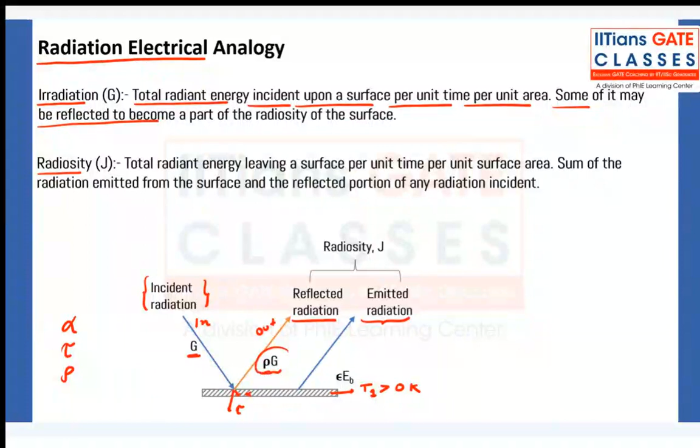Now, how do we write this? It is E is equals to emissivity into EB, since the body is at temperature greater than 0 Kelvin. And this is because of its reflectivity.

Everything that is going out is called radiosity. Total radiant energy leaving a surface per unit time per unit surface area.

Total radiant energy leaving a surface - what is going out? Irradiation is basically what is incident. Radiosity is what is going out - the sum of the radiation emitted from the surface and the reflected portion of the radiation incident.

Okay, chalo. So, radiation electrical analogy - this is what we are going to do. We are going to define electrical resistance. Now, this is one body at temperature T1. And here we have some surrounding.

Even if surrounding is not there, still electromagnetic waves will go out. But of course, it's not vacuum, so there are some surroundings.

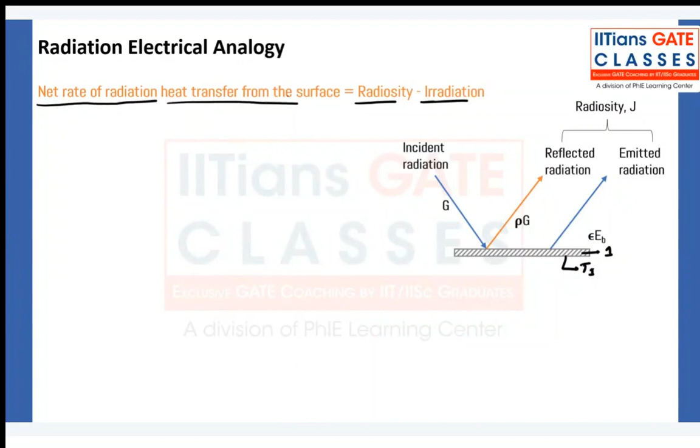So we have defined G. Now, net rate of radiation heat transfer from surface 1, which is at temperature T1 - what is the net rate of radiation? It is radiosity minus irradiation: what is going out minus what is coming in, since we are talking about net rate of radiation heat transfer from the surface.

So can I say Q dot net 1 per unit area is equals to J minus G, radiosity minus G? Now I have just defined G as J minus emissivity EB1 upon 1 minus emissivity. So I can simplify it further: J minus emissivity J minus emissivity EB upon this, now I can cancel this plus minus.

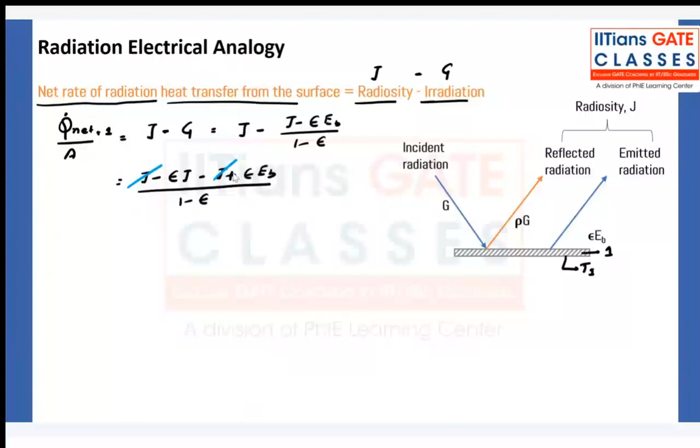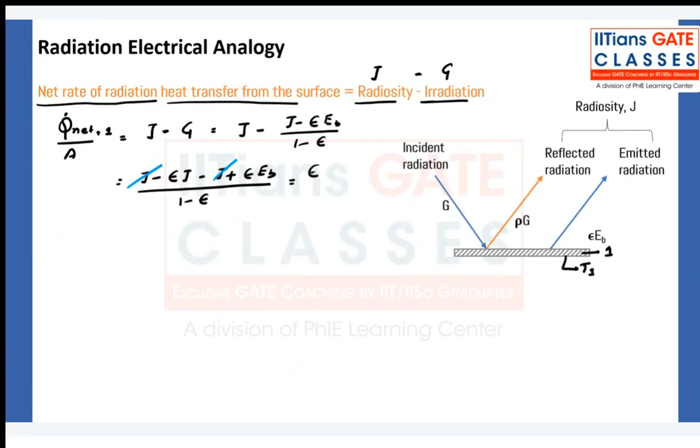Here you will get plus because there is a minus, so when you take it as common, it will become plus. Now how can I write this? Can I write emissivity EB minus J, 1 minus emissivity.

Now let me further simplify it in a way that we know our resistances. So Q dot net 1 per unit area is equals to EB minus J, 1 minus emissivity upon emissivity. Have we seen this form of equation before? Can I say it is the driving force, like the temperature we had - temperature was driving the heat transfer. So this is the driving force and this is the resistance.

Now what is this resistance? This is called surface resistance, because it is happening because of the surface properties: emissivity and reflectivity. So it is called surface resistance.

If you want me to show this, I can show it like this. For example, if this is your body, and if this is a black body, then its radiation will be EB. Now if this is not a black body, it will be emissivity EB. Now because of its surface, it will offer some resistance. This is your EB, this is your J, and this is your Q dot net per unit area, and this will be your surface resistance, 1 minus emissivity upon emissivity.

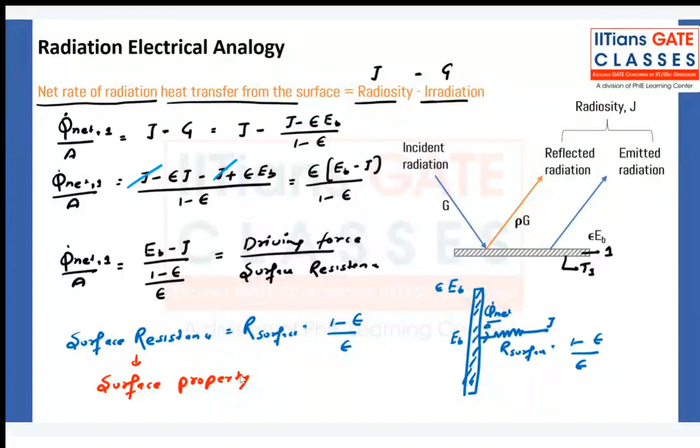So we have defined surface resistance, which is equal to this. Now, for a black body emissivity is equals to 1, so I can say Ri is equals to 1 minus 1 upon AI. Now 1 minus 1 will be 0 upon AI, so surface resistance will be 0 for a black body.

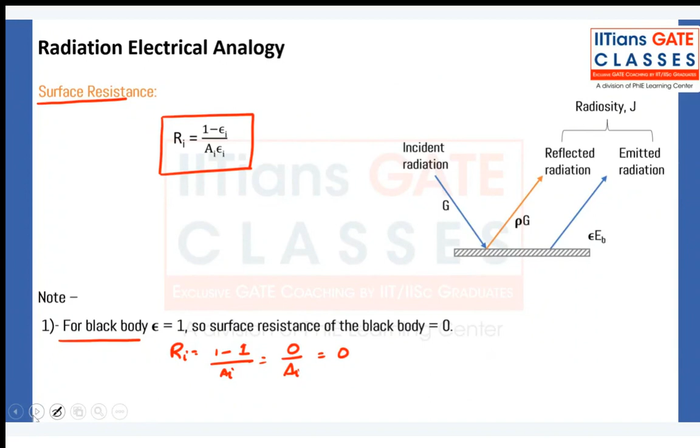Now let us move on to the next topic. We have learned how much radiation heat transfer goes out from a single body. Now let us talk about radiation heat transfer between two bodies, two surfaces. This surface 1 is at temperature T1 and is a non-black body, so its emissivity is E1. Surface 2 is at temperature T2 and its emissivity is E2. Let us assume T1 will be greater than T2, so T1 will have more radiation going out than T2.

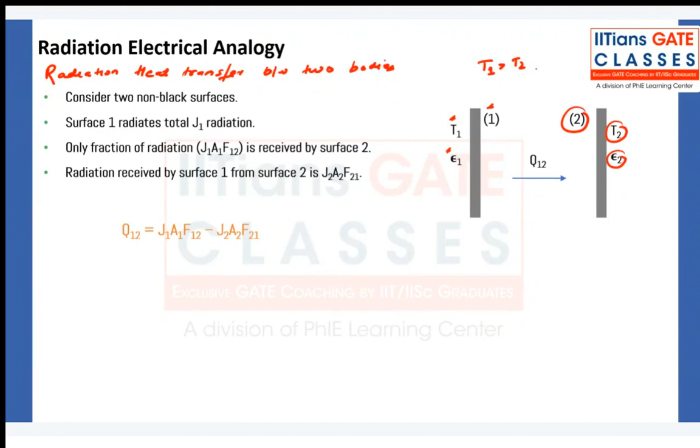Now let's consider two non-black surfaces. Surface 1 is radiating total J1 radiation - what is going out is J1, the total radiation leaving surface 1. Out of this J1, some will be lost and some will be captured by surface 2. How much is captured by surface 2 is given by J1 times A1, which is the total energy going out. If you multiply it by F12, you get the fraction received by surface 2.

Similarly, radiation received by surface 1 from surface 2 is J2 A2, this is Q2 to 1. If you multiply it by F21, it is the total fraction received by surface 1. Now let us talk about how much heat, Q1 to 2, falls from 1 to 2 - what is the radiation heat transfer from surface 1 that is reaching surface 2. So this is what is going out: Q out of surface 1 minus Q in by surface 2, which is J2 A2 F21.

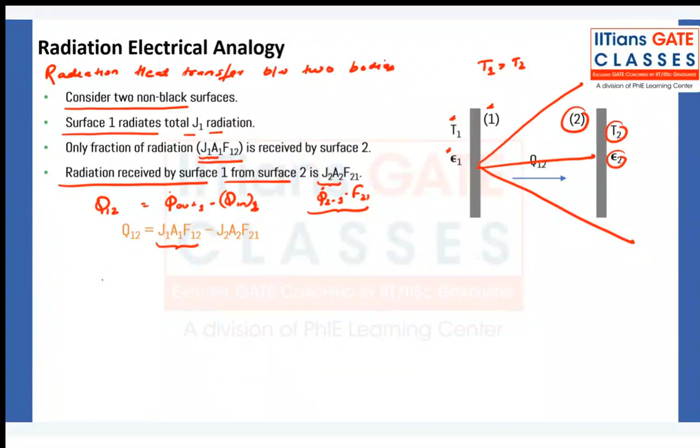Now tell me, what is reciprocity theorem? Reciprocity theorem. A1 F12 is equal to A2 F21.

So can I write the above equation as J1 minus J2 into A1 F12? Can I further write it as J1 minus J2, 1 upon A1 F12?

Now this is the space resistance. Why is this the space resistance? It does not depend on the surface, it basically depends on the distance, it depends on the orientation of the body. So it does not depend on the surface, it depends on how the two bodies are separated. So this is called J1 minus J2 by space resistance.

Now if you need to draw this diagram, how can I draw it? So there is body J1, it is J1, it is J2, and some heat transfer is happening Q1 to 2, and it will be equal to resistance, which will be equal to 1 upon A1 F12.

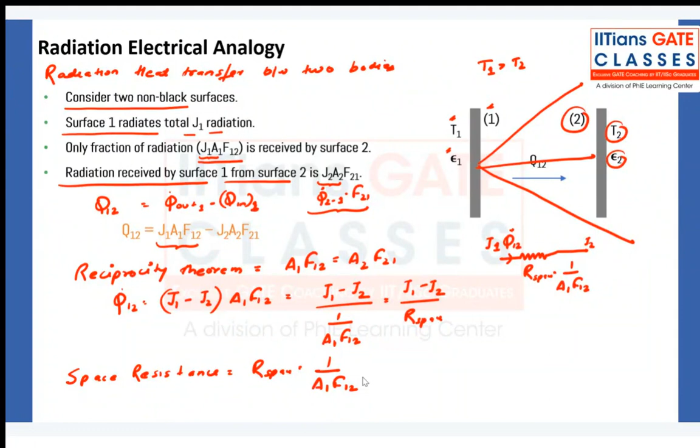Now this is a total thermal circuit. If you have surface 1, you will have a surface resistance. Now there is space also between them, so there will be a space resistance. Let's say this is R1, R2 is space resistance, and again because of surface 2, every surface has a resistance, so this will be R3 surface resistance.

R1 is equal to 1 minus... now let me divide these resistances. First, surface resistance: if there is a surface, there will be a surface resistance. R surface because of surface 1 will be equal to 1 minus emissivity 1 upon A1 emissivity 1, and because of surface 2 it will be 1 minus emissivity 2 upon A2 E2.

Then second is space resistance. So R space will be equal to 1 upon A1 F12.

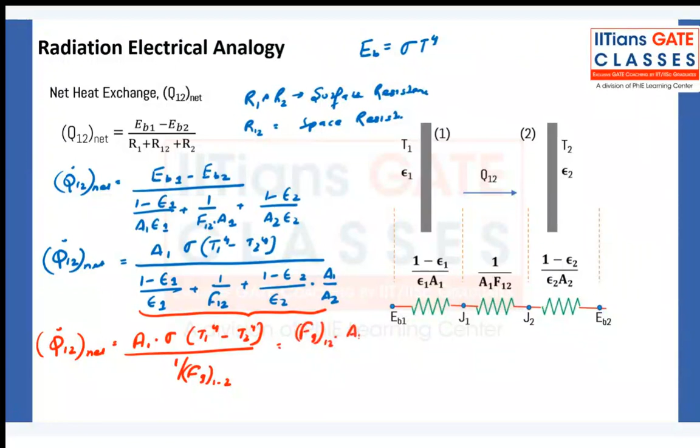Now this denominator is called the gray body factor. So I can write it like F... A1 sigma T1 to the power 4 minus T to the power 4, 1 upon Fg one to 2. This is called the gray body factor. So I can also write it as Fg1 to A1 sigma T1 to the power 4 minus T to the power 4. So what is Fg12?

What is Fg12? Gray... in fact I have written it here, it is called the gray body factor. So Fg12 is gray body factor, and it is 1 upon this total resistance.

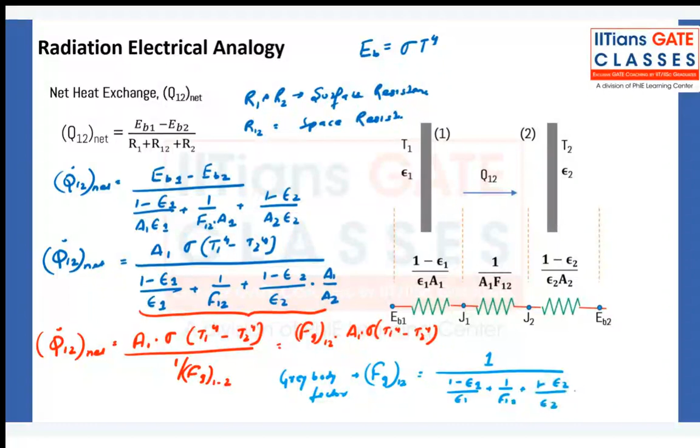Okay, this is your gray body factor.

Now, can you tell me, if we want to compare it with conduction and convection, what is a relevant term that relates to this? Do you remember that term? Yes, overall heat transfer coefficient. Okay, overall heat transfer coefficient. So it is equivalent to that, right?

It is a combination of surface resistances. There, U was the combination of conduction and convection resistances. Here, gray body factor is a combination of surface and space resistance. Now we need to apply this.

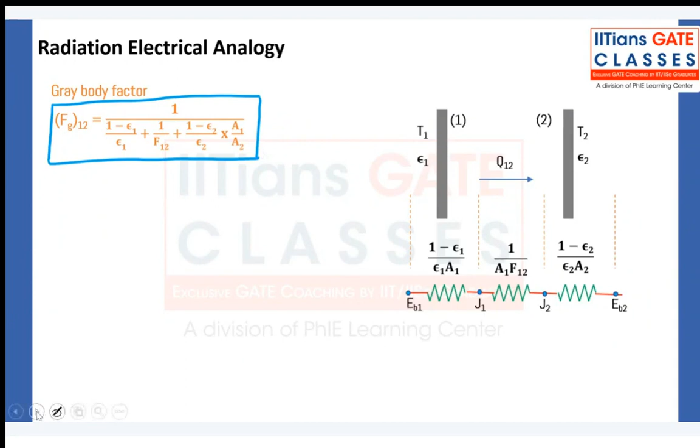For example, we have this type of body. What is this body? We have a small, very small object in a very large space - small object in large cavity. For example, a small plate is there in a very big hall, a very big room. If they have given the dimension of the room, that means it is not a big room, it is a finite room. If they have not given the dimension, it means it is an infinitely large room and a very small body is inside that room.

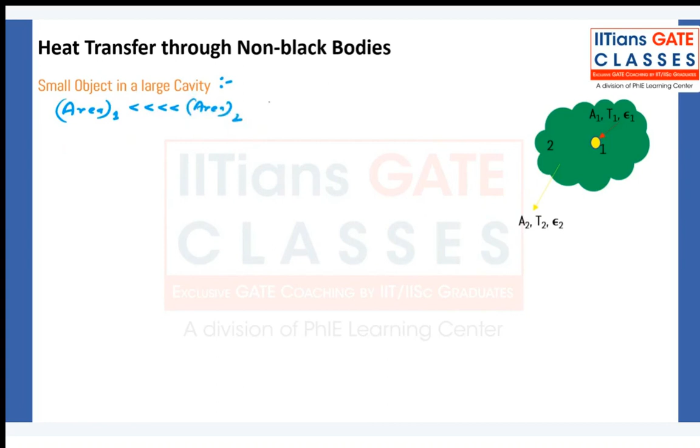So in this case, this will only happen when area of one is very, very, very less than area of body 2. So can I say A1 by A2 tends to 0? I can say this, right? Okay, yes, it tends to 0.

Now, whatever is radiated from body 1 will be absorbed by body 2, isn't it? So this is one condition, and I can say F11 will be equal to 0 and F12 will be equal to

1. Chalo. Now let's talk about gray body factor. So how did we define Fg? How did we define Fg 1 to 2?

Fg 1 to 2 equals 1 upon [1 minus emissivity 1 upon emissivity 1] plus 1 upon f12 plus [1 minus emissivity 2 upon emissivity 2, times A1 by A2], right? Now, because A1 by A2 tends to 0, this whole term will go to 0, and f12 equals 1. That means I can simplify this as 1 upon [1 upon emissivity 1] minus 1 plus 1. Can I write it like this?

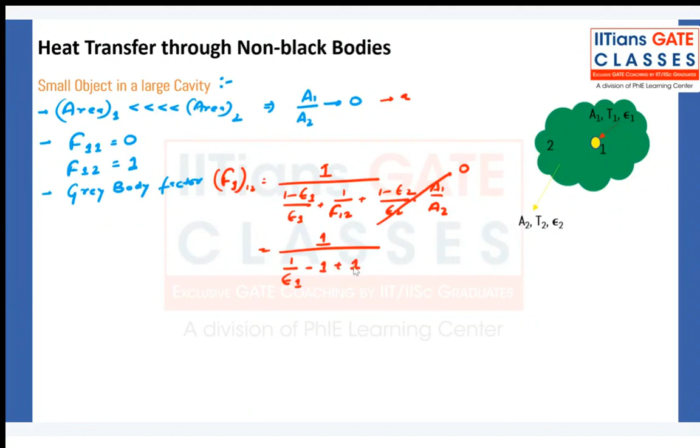Yes. Now this will get cancelled and Fg12 equals emissivity 1. So now next is how do you calculate heat transfer?

So Q dot net 1 to 2 - how was it? Fg 1 to 2, sigma, A, T1 to the power 4 minus T2 to the power 4, right? A1. Now, Fg12 equals emissivity 1. So Q equals A1, emissivity 1, sigma, T1 to the power 4 minus T2 to the power 4, watts. Okay? Is it clear?

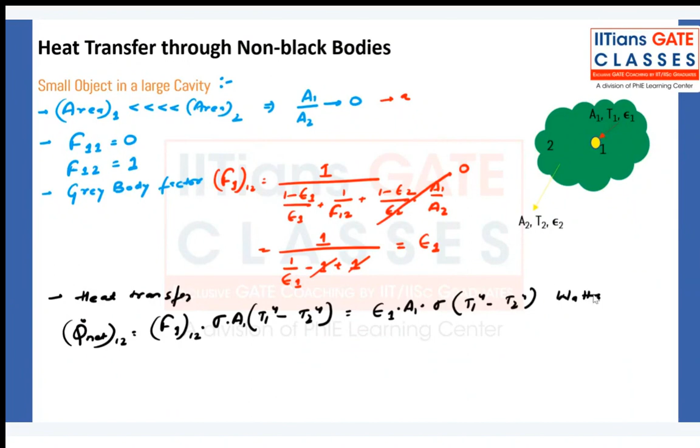Chalo, next example is infinitely large parallel plates. There are two plates that are infinitely large; their area is infinitely large.

Okay, so first condition: radiation from one is absorbed by two, and vice versa. So whatever is radiating from two is absorbed by one.

Okay, and area of both the plates is infinite. So can I say A1 equals A2 equals area, and they are all equal to infinite? They are all equal to infinite.

Now also tell me one thing: why is it a plane surface? So how much will be F11? How much will be F11? Yes, F11 equals 0. And Sean has told me that F22 will also be equal to 0.

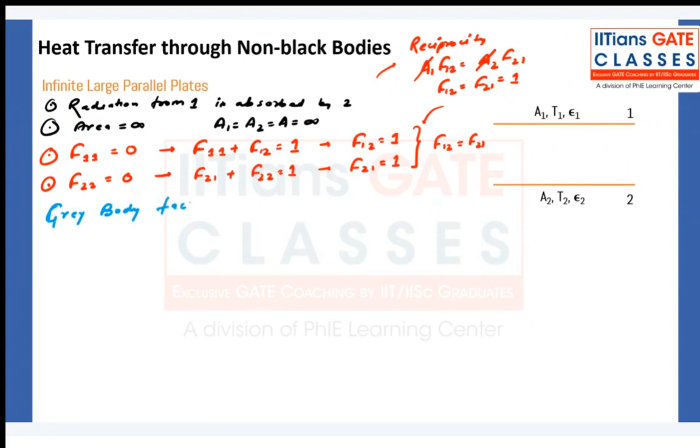FG 1 to 2 equals 1 by [1 by emissivity 1 minus 1, plus 1 upon F1 to 2, plus (1 minus emissivity 2) upon emissivity 2, times A1 by A2]. You can also calculate FG 2 to 1, but then you have to modify the equation similarly. This is the gray body factor when you calculate radiation heat transfer from 2 to 1.

Now, what can I do? F12 equals 1, and A1 equals A2. So can I write 1 upon emissivity 1 minus 1? By simplifying this, with F12 equals 1, this becomes plus 1, plus 1 minus emissivity 2 minus 1. By simplifying this, and since A1 equals A2, the minus 1 and plus 1 will be cancelled. So what do I get here? 1 upon [1 upon emissivity 1 plus 1 upon emissivity 2 minus 1].

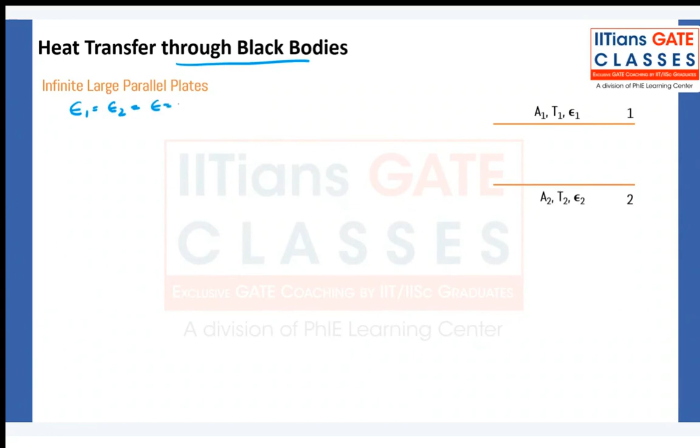Now we have a finite value of emissivity 1 and emissivity 2, meaning these are non-black bodies. What if these are black bodies? If both are black bodies, then emissivity equals 1. The case remains the same: 1 upon [1 upon emissivity 1 plus 1 upon emissivity 2 minus 1]. Now emissivity equals 1, so 1 plus 1 minus 1, so FG12 will remain as 1. So Q12 net, which equals FG12 sigma A (T1^4 minus T2^4) watts, will simply equal sigma A (T1^4 minus T2^4) watts, only in the case of black bodies.

Yes, you will see that, don't worry. I have seen that question. I have not read it. I don't know. Okay, we'll see that.

Is this clear? Yes or no? Okay, let's continue.

Now the last concept is the radiation shield. Why do you use a radiation shield? To reduce heat transfer, of course. A shield is always there to reduce heat transfer. It is a thin, highly reflective body of very high reflectivity and low emissivity, a sheet of material which reduces radiation heat transfer between two surfaces. So if there are two surfaces, you put a very shiny body here to reduce the heat transfer. It will have very high reflectivity and low emissivity, so it will reduce the overall heat transfer between two radiating surfaces.

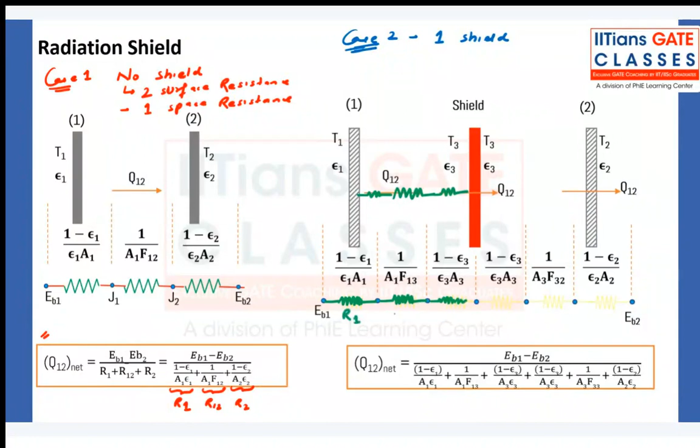Now you see, first there will be a surface resistance because surface 1 is at higher temperature. Then there is a space resistance in between, the space resistance between surface 1 and the radiation shield. So this is R1, this is R13, and this R3 is because of the radiation shield surface.

Now this is a surface, one surface is surface 1, and this is also another surface 2. So this shield has two surfaces taking part in the heat transfer. But for this surface, only the other side is taking part in heat transfer, that's why we have only one resistance. Similarly for surface 2, only this part is taking part in heat transfer, so only one surface resistance.

Now this surface resistance is because the shield is radiating or absorbing radiation from the other side. Now this is the space resistance, this is R3 and this is also R3. Now this is R31, R32, and this is R2. Is this diagram clear, or is there any doubt?

Each surface will have a surface resistance, and if two surfaces are separated by a space, then you will have one space resistance as well.

Now tell me, if I have introduced one shield, how many surface resistances do I have? I have a total of 4 surface resistances. By adding one shield, the total surface resistances are now 4. I did not ask additional, I said total: 4 surface resistances.

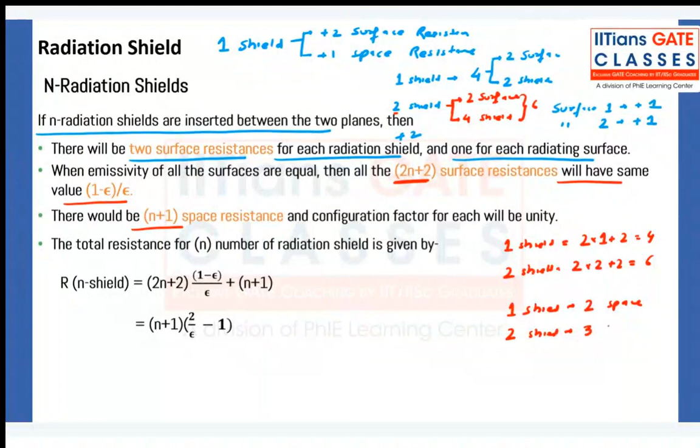Now what about space resistances? For n number of shields, the total space resistance will be n plus 1. For example, one shield, so total two space resistances. If there are two shields, so three space resistances, total three.

Now the total resistances because of n number of shields is given by surface resistance plus space resistance. Yes.

One shield will have one additional resistance. No, look, if you see this one, you already had one space resistance here, so one was already there, but you have added one more space resistance. So by adding one shield, you have additionally one space resistance, additionally one, total two, additionally one.

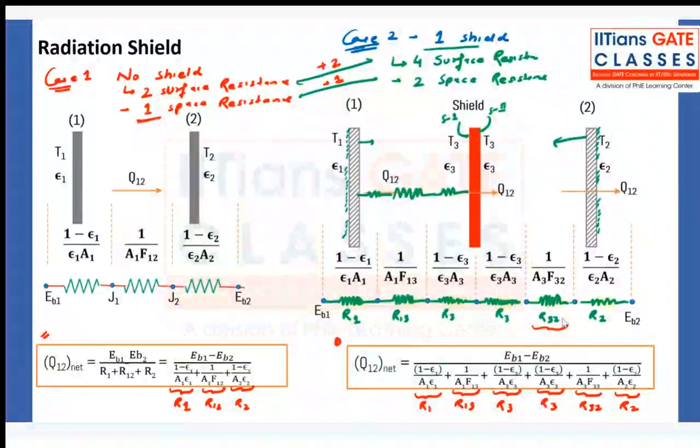So this is giving me total, n plus 1 is total. So if I am introducing n shields, the total resistance will be total surface resistance plus total space resistance. Now n plus 1 I can take common and I can simplify it like this, but I can take 2 common.

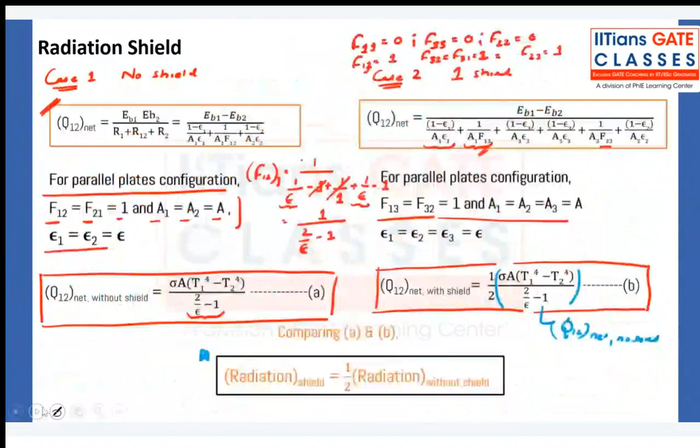This is your total resistance with N shields. Heat transfer will be driving force divided by resistance, so this will come down with resistance. Without shield, I had this total resistance, which we already defined by simplifying it. This is heat transfer by driving force divided by resistance.

If I divide these two equations, with N shields this term will be QA. I don't think I need to do this, it's very simple.

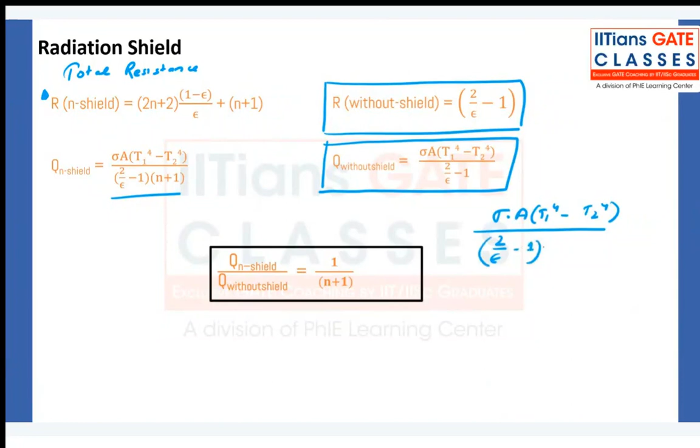Upon 2 by emissivity minus 1, N plus 1 — this is with shield. Without shield is T1 to the power 4 minus T2 to the power 4, upon emissivity minus 1. So this and this will get cancelled, this and this will get cancelled, and finally you can conclude this.

With N shields, this is how your heat transfer is going to reduce compared to without shield, because you are dividing it by something. This value will be less than 1, because N plus 1 in the denominator is greater than 1 than the numerator. So it will be less than 1, meaning the heat transfer is reduced by an amount we can calculate with this formula as well. Okay, clear?

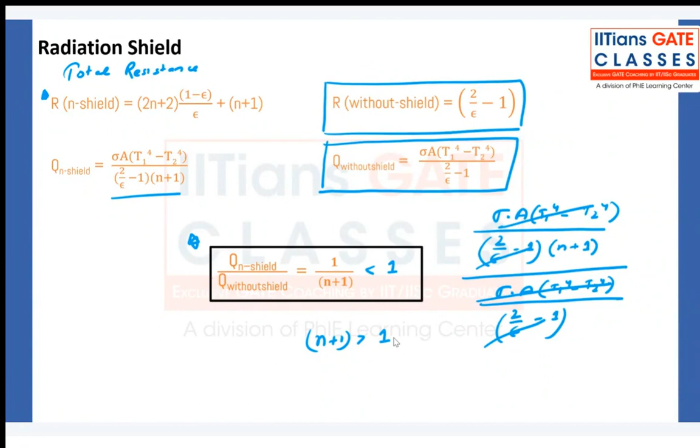Now let us come to the last portion, which is our numericals. We had done so many numericals that day as well, but they were focused on view factor. Now this is radiative heat transfer between bodies, between two bodies.

Okay chalo, now, GATE 2003, 1 mark question. It is not supposed to be a 1 mark question, I think I made a mistake. It is supposed to be a 2 mark question at least, but anyway it is a question that is more than enough for us.

A plate having 10 centimeter square area on each side is hanging in the middle of a room. So let's say you have a room, and a plate is hanging here. Let's say this is your 1, and this is your 2 — the inside of this room is 2.

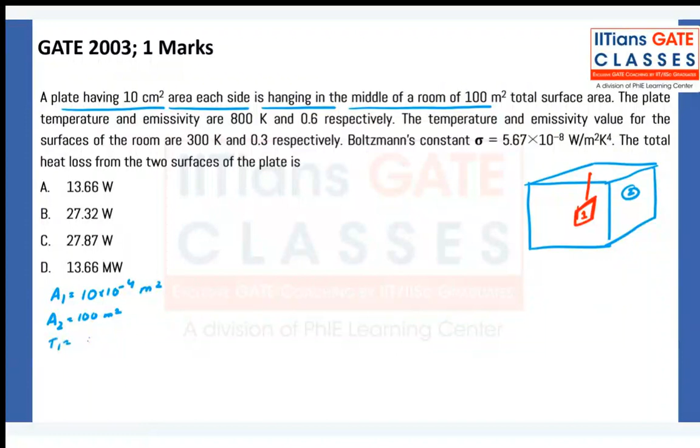Now what can I say? A1 is equals to 10 into 10 to the minus 4 meter square, area of plate, and room is 100 meter square. The plate temperature T1 is equals to 800 Kelvin and emissivity E1 is 0.6. Plate temperature and emissivity are given, and temperature and emissivity of room is also given: T2 is 300 Kelvin and emissivity is 0.3.

Okay, chalo. Now Boltzmann constant is given. Total heat loss from the two surfaces of the plate I need to find out. Can you do that? Okay let me tell you, then from next you have to do it.

Okay chalo, total heat loss from two surfaces of the plate — what is the heat loss from the plate? So plate is our 1. Q dot 1 will go to 2.

Net will be equal to, as I have already defined, A1 sigma T1 to the power 4 minus T2 to the power 4, upon 1 minus emissivity 1 upon emissivity 1, plus 1 upon F1 to 2, plus 1 minus emissivity 2 upon emissivity 2 times A1 by A2. This will be the heat transfer from one side of the surface.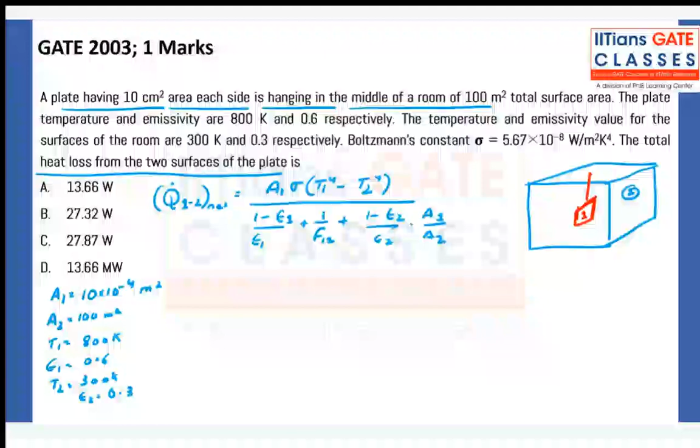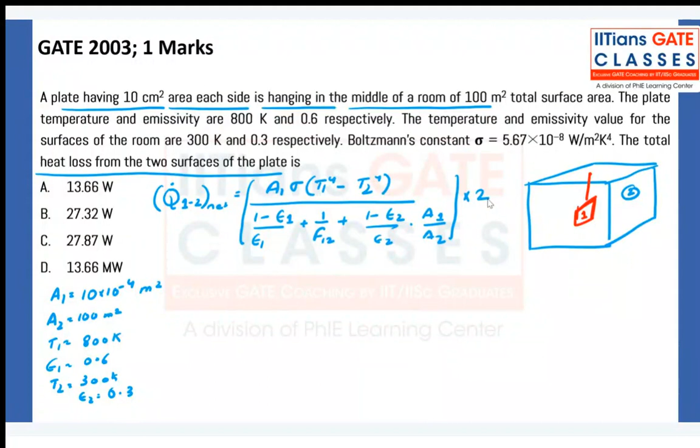This will be the heat transfer from one side of the surface. In order to get the total heat transfer, I need to multiply it by 2. So I think we know everything — we know A1, A2, emissivity 1, emissivity 2, T1, T2, and sigma is given in the question. The only point is F1-2.

Can anyone tell me what is F1-2? Yes, it will be 1, of course. Since it is a plane surface, F11 will be equal to 0. Then I can apply the summation rule: F11 plus F12 is equals to 1, and F12 is equals to 1 because F11 is 0.

So can you calculate this for me and tell me what is the answer? You just have to put the values. Solve it quickly and tell me the answer. Or do I need to solve it for you? Are you solving it? Tell me yes or no first. Okay, solve it and let me know the answer.

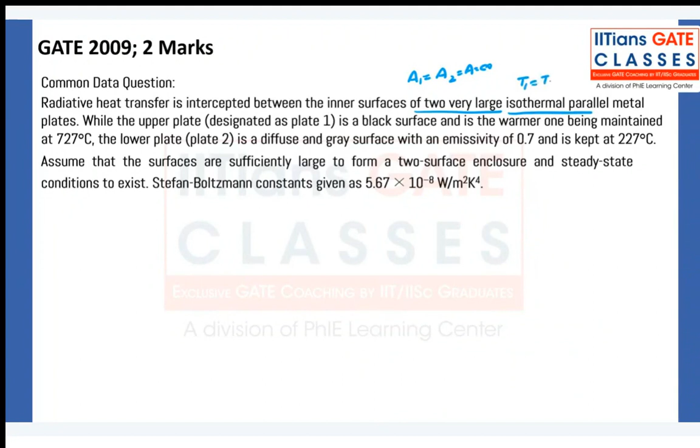Temperature is not changing of the body. There is an upper plate and a lower plate. Let's say this is the upper plate, and we have a lower plate, of course, if we have an upper plate then. Okay, so the upper plate, they are saying it is 1, designated as 1, so of course this will be 2.

Now they are saying it is a black surface. It is a black surface means emissivity is equal to 1. And it is the warmer one being maintained at temperature T1, 727 degrees Celsius. Now the lower plate is a diffuse and gray surface. Just one second.

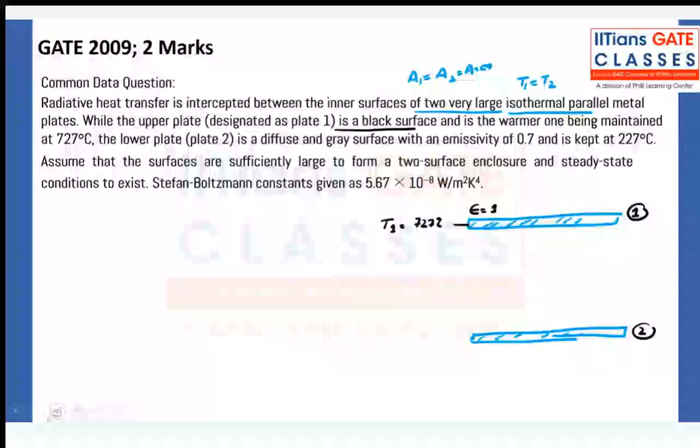727. So it is diffuse and gray, which means it will have some emissivity value. What is the emissivity? Emissivity is equal to 0.7, and it is kept at 227 degrees Celsius.

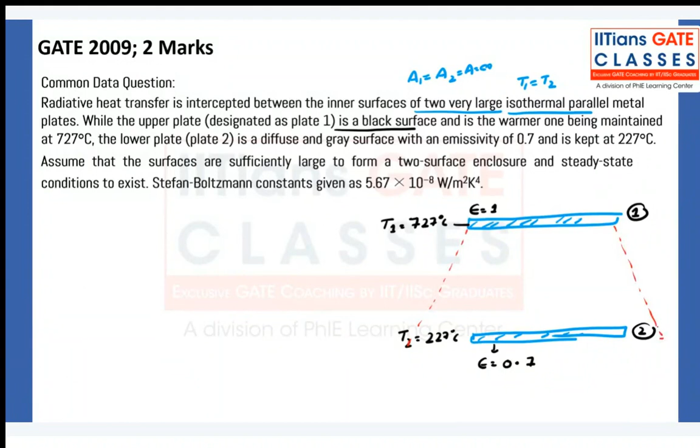Assume the surfaces are sufficiently large to form a two surface enclosure. What does this mean? They are infinitely large, so everything coming out from one will be absorbed by two, and what is going out from two will be absorbed by one. Even if there are some radiations going out at the ends, they are significantly negligible compared to the amount absorbed by body 2 from body 1, because these are very large bodies. This is the same as the long cylinder case.

What do you mean by enclosure? It means whatever is going from one will be absorbed by two.

Okay, now this is a black body. So it is going to radiate EB1. Now, out of this EB1, because of its reflectivity, it is going to reflect some. So reflectivity, I can also write as 1 minus absorptivity, times EB1. We have proved this in the beginning.

Now, this body is at 227 degrees Celsius. Because of its temperature, it will also be emitting something. How much? It will be its emissivity into EB2. If this would have been a black body, then EB2 would be going out, but because it is a gray body...

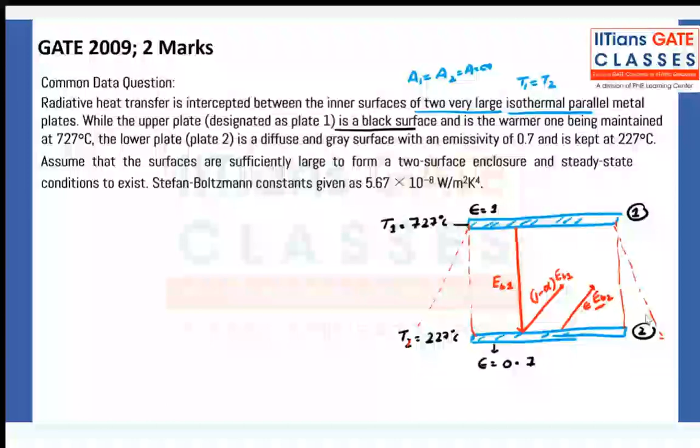What is going out? Emissivity into EB2.

Sorry, I'm waiting for something.

Now it is saying assume that the surfaces... what we need to calculate, it will tell us. So it is a common data question. Let's go to the question. This is what they have given me in the question.

Now, the irradiation from plate 1 - what do you mean by irradiation? Can you tell me what is irradiation? Irradiation is G, yes, Shruti is right. J is radiosity, no, they are asking for irradiation, not radiosity.

What is irradiation? Irradiation is G, what is incident on the surface. Radiosity is what is going out.

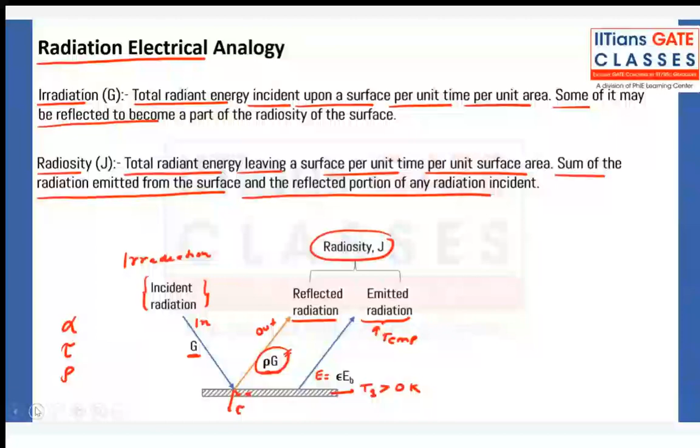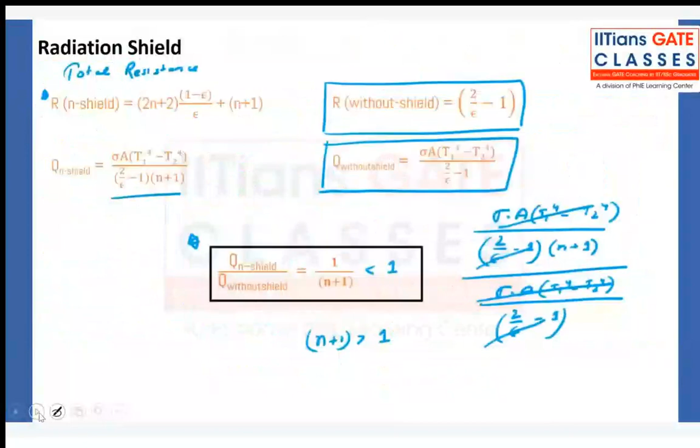G is irradiation, so I need to find out G. Now what will be G? Whatever is going out of surface 2 will be absorbed by surface 1, isn't it? So G for body 1 will be equal to what is going out from body 2: emissivity into EB2.

Plus 1 minus alpha, one second. Sorry, okay, it is first of all emissivity 2. I just hope that I would not be getting cold tonight, otherwise I would have to postpone your class.

Chalo, 1 minus absorptivity 2, and what else? EB1 - it is the portion of EB1. So now, will you be able to calculate this? You know everything, and you also know that emissivity equals absorptivity also.

For a real body that is in thermal equilibrium, all the conditions are satisfied. So this you can solve. Solve it very quickly and tell me the answer.

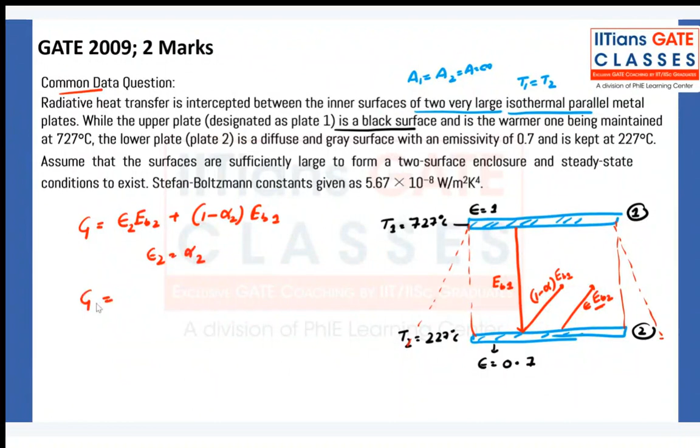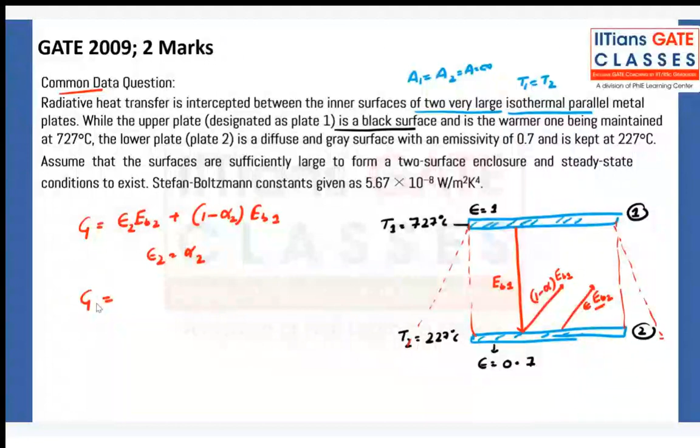Yes, let us see, so it is 19.5. Is everyone getting the same answer? Or has Sean done something wrong? Don't worry Sean, you have not done anything wrong, I'm just kidding. Just give me one minute, everyone solve and give me the answer.

Tell me. Shruti, Vijaya, have you not solved it or what? Okay, Vijay is not here. We have to solve his question as well. I don't know where he went.

Shruti, are you able to solve this? There is nothing in this, no? Tell me the answer, what you have calculated. Getting 17.6? No, why? G1 is equal to 0.7, is it? How much is it? Yes, it is 0.7, okay.

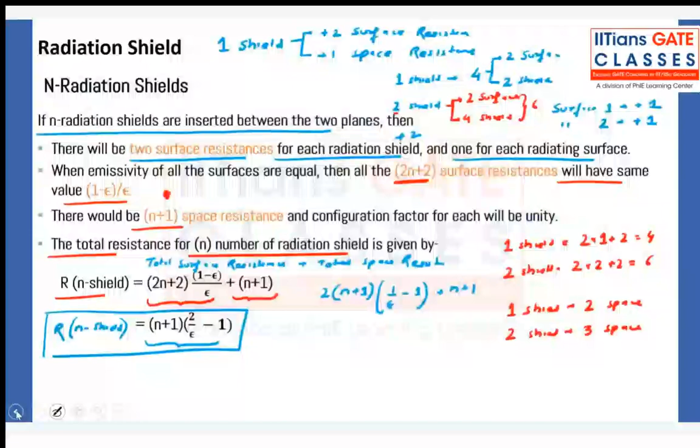A1 is equals to A2 is equals to area is equals to infinite. Is it clear? And what we have done - do you remember we have defined Fg12 for this particular case? What was it? Do you remember or not? In the same case we have defined it when it is for black bodies, but when it is not black bodies, what is this? It is this. Same case we have defined. So we can directly calculate, we don't have to write everything. Chalo, calculate this.

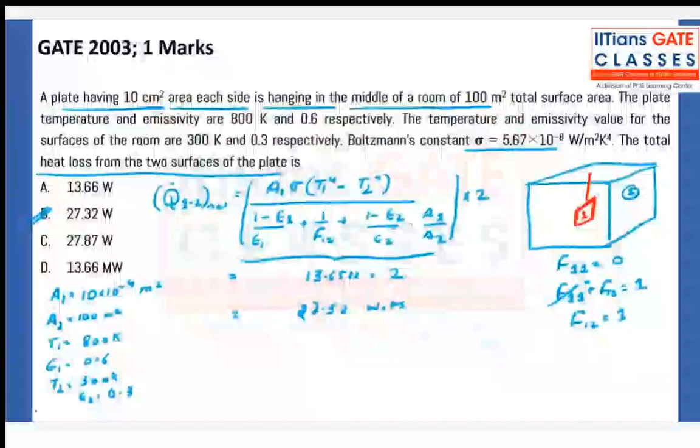1 upon 1 upon emissivity 1 plus 1 upon emissivity 2 minus 1. Now you know everything. Emissivity 1 is this, emissivity 2 is 0.7, right? Sigma also 5.67 into 10 to the power minus 8. And what else do you need? T1 is 1000 Kelvin, T2 is 500 Kelvin. Can you calculate this?

Fg21 - what do you mean? How to write, I do not understand. Do you want to calculate Fg21?

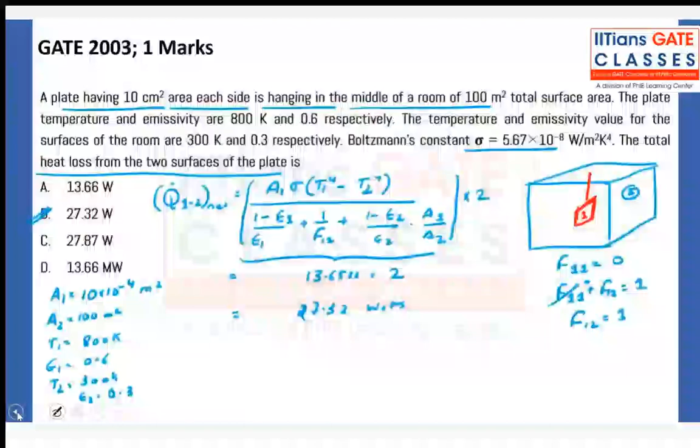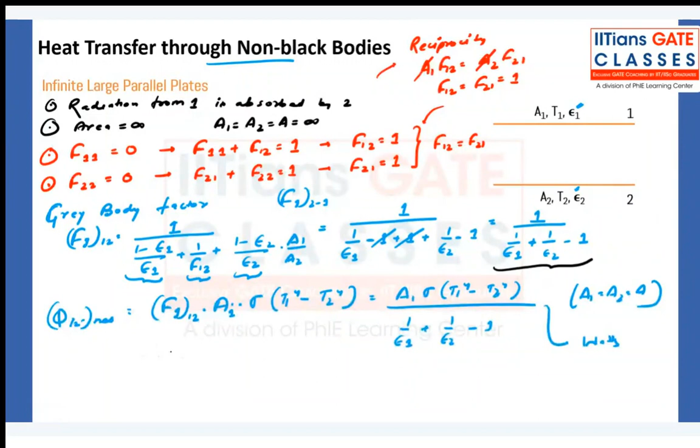Okay, so you can do the same thing, no? Like what we did here, for this body you can talk about how it goes from 2 to 1. So instead, it's simple only, right? Fg 2 to 1 will be equal to - now you take body 2 first. So 1 minus emissivity 2 upon emissivity 2, plus 1 upon F21, plus 1 minus emissivity 1 upon emissivity 1, A2 by A1. Now F21 is also 1, right? So you can put the values. A2 by A1, A2 by A1, it's the same only, A2 by A1 is infinity, you will get as 1.

So the only simple thing you will get here is 1 upon 1 upon emissivity 2 plus 1 upon emissivity 1 minus 1. Simple only, it will remain the same.

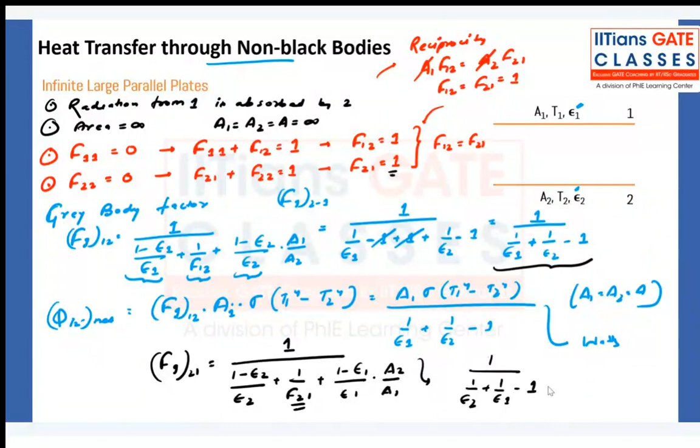Very nice. Okay, so what is the value of FG12? 0.5957, so let's say 0.6.

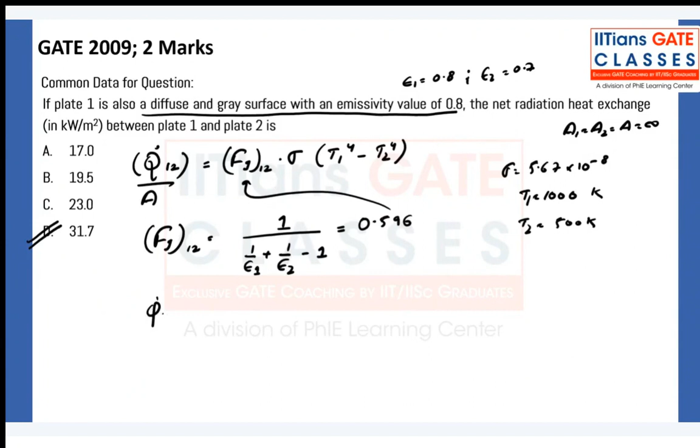Okay, and then you put it here - sigma, T1, T2 - simple only. What is there? Okay, chalo, in kilowatts, Q12 per unit area is equals to 31.7 kilowatt per meter square. This is my answer. Chalo, let's move on.

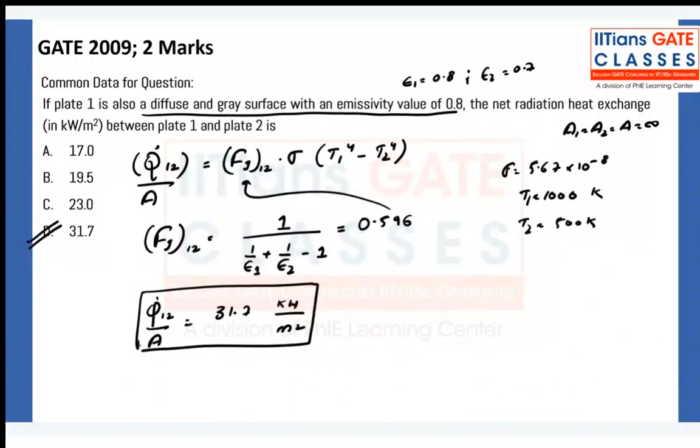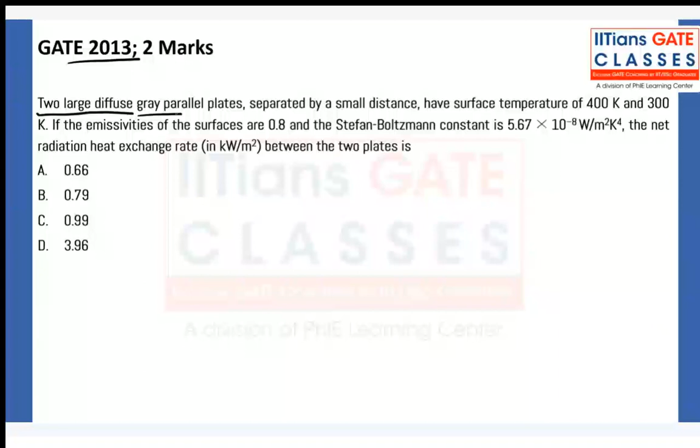Two large diffuse gray plates separated by a small distance - again the same case, GATE 2013 2-mark question. Very large, diffuse - this time both the bodies are diffuse, like the same thing we did earlier, the same thing is going to be applied. Now one is at 400 Kelvin - body one, let's say - body two is at 300 Kelvin. Emissivity of both the surfaces are 0.8. So now this is also 0.8, this is also 0.8. So it's easier only, it's easier only.

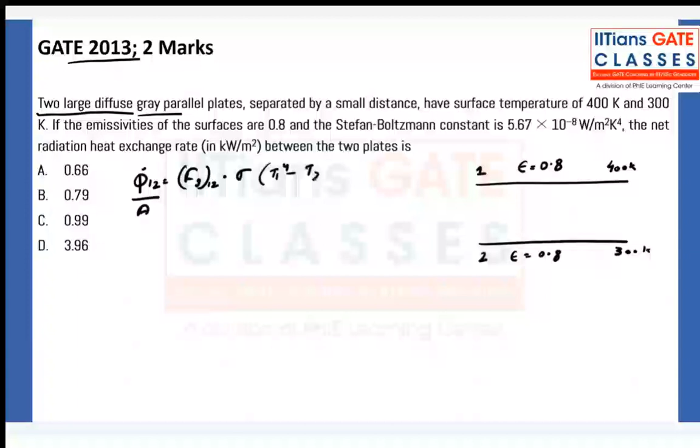Why? By Q12 is FG12 sigma per unit area - I'm calculating - T1 to the power 4 minus T2 to the power 4. Now what is Fg in this case? By the same case, 1 upon 2 upon E minus 1. Isn't it? We have seen this as well.

Both, if both are same, so it will be 2 upon emissivity. So you can calculate this very quickly. Tell me what is the answer.

So Vijay is saying A. Does anyone want to contradict this? Okay, A - everyone is saying A. Very nice, very nice, very nice. A is the answer.

Q12 per unit area is equals to 0.661 kilowatt per meter square. Very nice. Chalo, let's move on, next question.

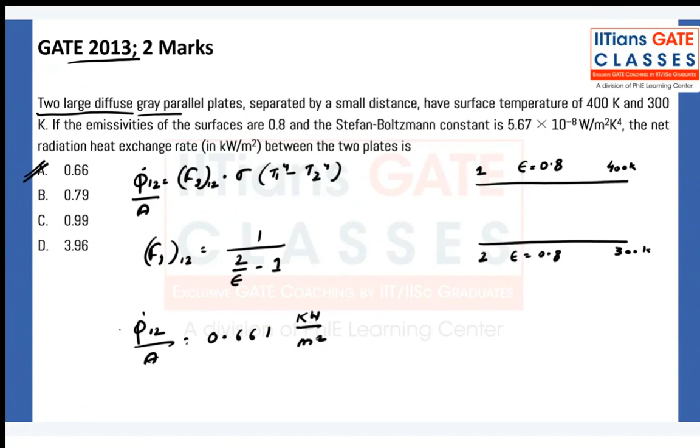A hemispherical furnace of 1 meter radius - we have a hemispherical surface and its radius is 1 meter.

Emissivity of the inner portion, this floor, is equal to 0.5 and temperature of this surface is 600 Kelvin. Stefan Boltzmann's constant is also given. We need net radiative heat transfer from the roof to the floor. So what do I need to calculate here? Q dot 2 to 1, because I have assumed the roof is surface 2. If I had assumed it as 1, I would calculate 1 to 2.

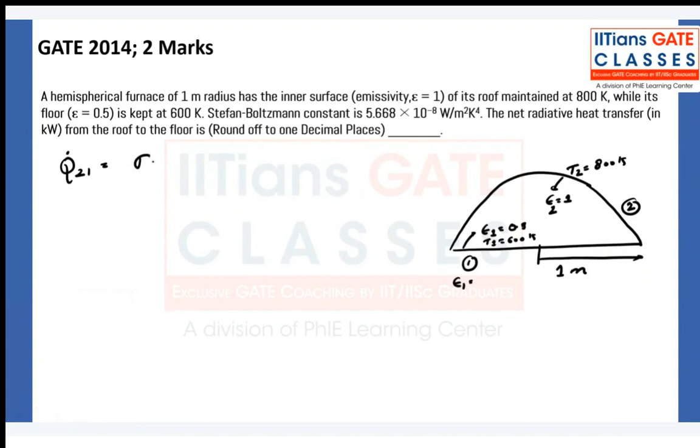So very simply, using Sigma, A2, because it is asking in kilowatts, not per meter square, I need to take one temperature and one area. Then T2 to the power 4 minus T1 to the power 4, divided by 1 minus emissivity 2 upon emissivity 2, plus 1 upon F21,

plus 1 minus emissivity 1 upon emissivity 1 into A2 by A1. So what is not known to me? F21 - I need to calculate F21. Can anyone tell me how much is F21?

I know one thing from seeing this figure: F11. How much is F11? It is 0, so F12 will be equal to 1. This is from the summation rule.

Now I can apply reciprocity, which is A1 F12 equals A2 F21. So I can calculate F21 from here as F12, which is 1, times A1 by A2. Now I need to calculate A1 by A2. What is A1, area 1?

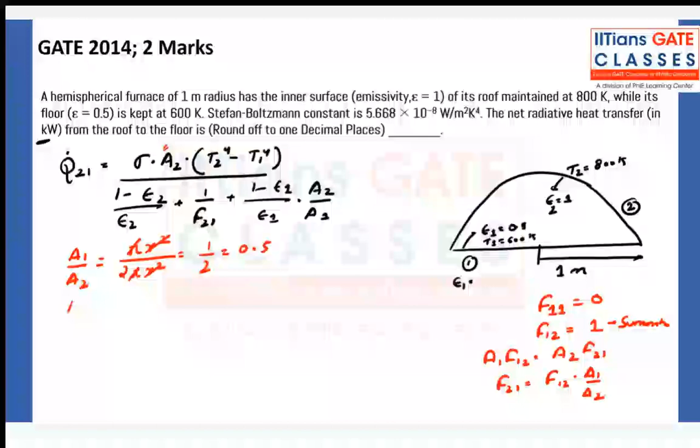But I need A2 as well separately. So let me calculate A2, which is 2 pi r square equals 2 pi times 1 squared. I don't know, just calculate how much it is. Now F12 is found, F21 is 0.5.

Now let me put the values. What is A2? Can you tell me what is A2? A2 is 6.283 meter square.

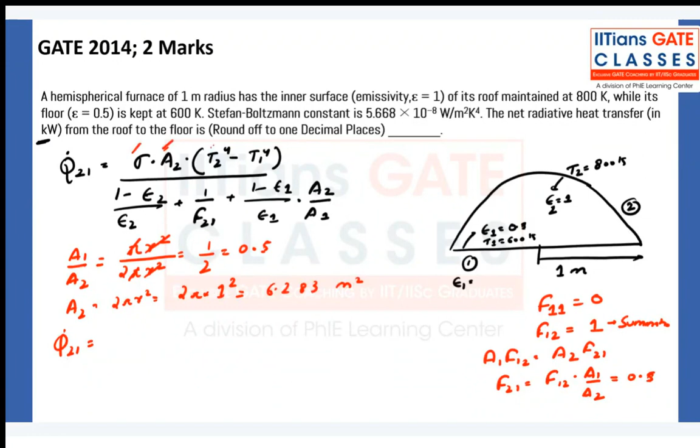Now everything I know: sigma, A2, T2 at 800, T1 at 600, emissivity 2. Emissivity 2 is how much? 1, emissivity 2 is 1. So this term will absolutely go out because 1 minus 1 will be 0. Now 1 upon F21, plus 1 minus emissivity 1, over emissivity 1 into A2 by A1.

Vijaya has solved it, but not solved it correctly. Something is wrong, check it again. I don't know if this area is correct, I am hoping it is correct. Anyway, it seems to be a realistic value, 2 pi.

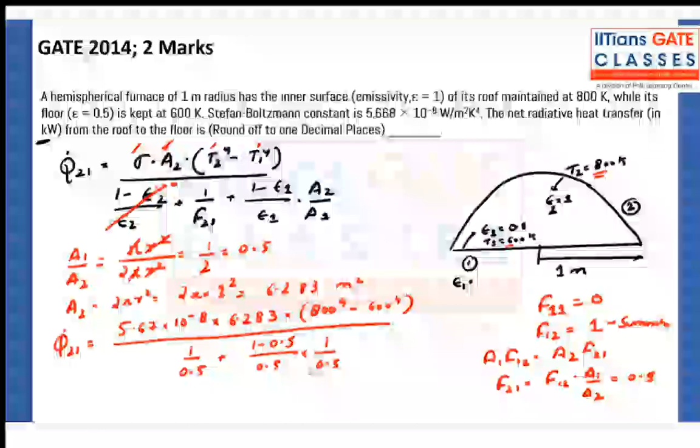Are you calculating it? Vijay has already given an answer but I have said it is wrong - the shape factor F21 you have calculated wrong. Calculate it again, now that I have put all the values here, so you can calculate, I guess. But it's still not correct. Why is this like this?

5.67 into 10 to the power minus 8, into 6.283, into 800 to the power 4 minus 600 to the power 4. Yes, 24.93 is the correct answer. So if Sean is getting it, that means my answer is correct. Sometimes I am not very sure my answer is correct because I just do a lot of shortcuts. 24.93 is correct.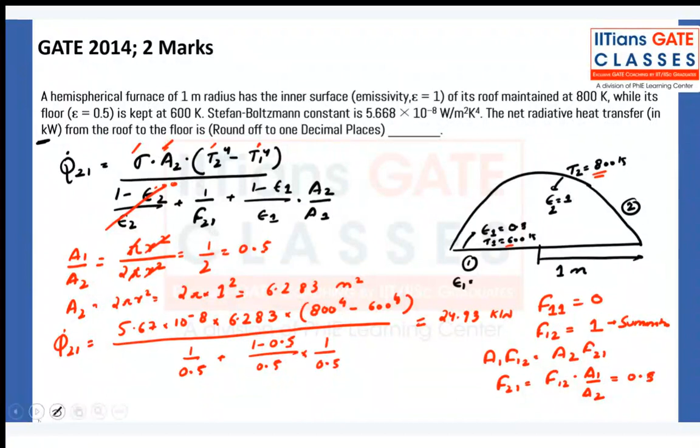This question is from year 2015, 2 marks. The total emissive power of a surface is 500 watt per meter square at a temperature T1, that is E1. And 1200 watt per meter square, that is E2 at temperature T2, where the temperatures are in Kelvin. Assuming the emissivity of the surface to be constant, find the ratio of T1 by T2.

It's very easy. We know that Stefan Boltzmann's law says - yes, that is correct - that emissive power of a black body is directly proportional to T to the power 4. So for a real body, it will be like this as well.

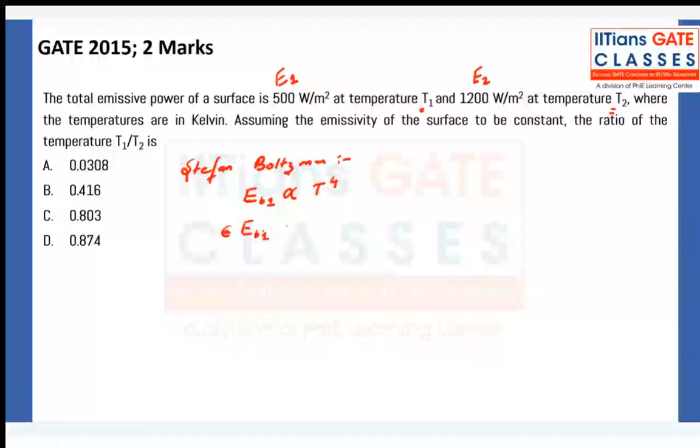But emissivity remains constant, yes. This is a 2 mark question, I think. Okay, do not focus on marks, just see that this type of question has come. So emissive power is proportional to T to the power 4. Now I can say E1 by E2 equals T1 by T2 to the power 4. So T1 by T2 equals E1 by E2 to the power 1/4 or 0.25. It's 500 by 1200 to the power 0.25. And you gave me the answer: 0.8034 is the right answer.

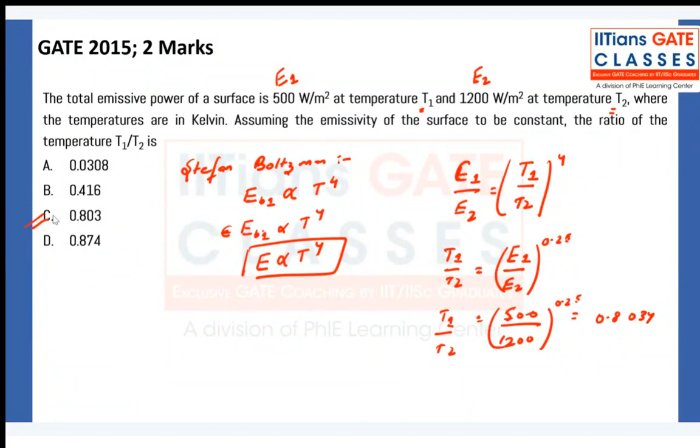Very nice, yes, 2 mark question. Usually I do not make mistakes that much, it must be of 2 marks only, but I'm not saying I'm perfect, I cannot do mistakes. Because sometimes when I make slides I do some copy paste, for example titles I can copy, these things I can copy. Sometimes I forget to edit because my focus is on the question, not on the extra information. But still, I try to be right most of the time, but I can go wrong. It's not that I can be perfect.

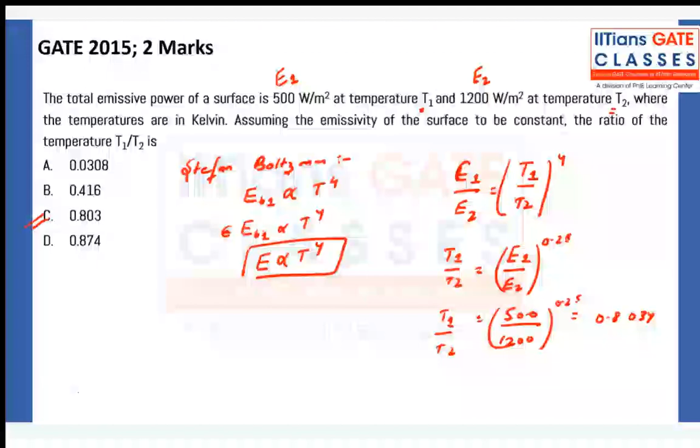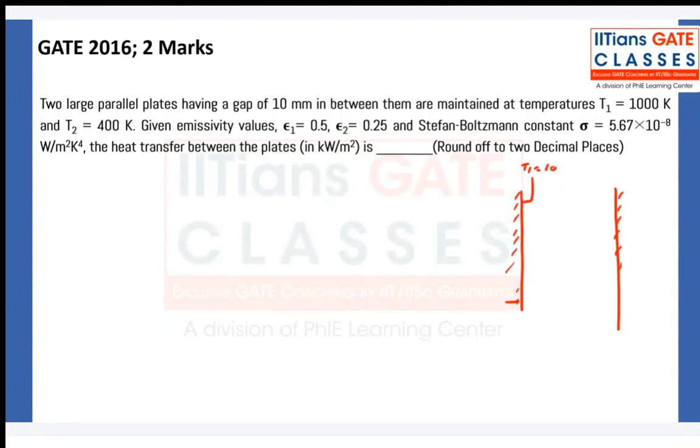Okay, let's move to the next question. Two large parallel plates having a gap of 10 millimeter in between are maintained at temperature T1 and T2. We have 2 plates. One is maintained at T1 = 1000 Kelvin and T2 = 400 Kelvin. Emissivity is also given: Emissivity 1 equals 0.5, Emissivity 2 equals 0.25. Stefan-Boltzmann's constant is given.

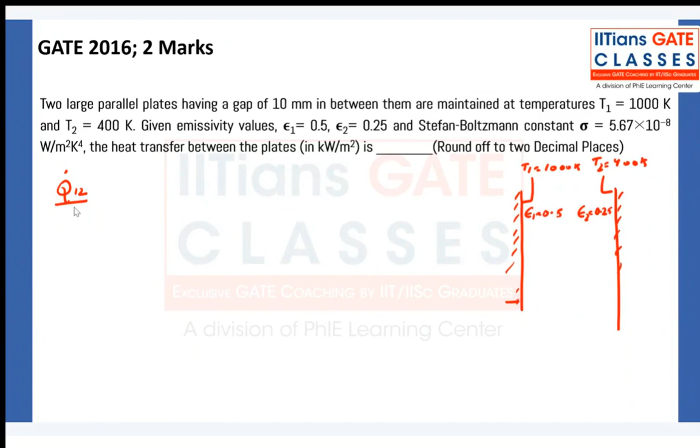Heat transfer between plates, it's very simple. That's why I was saying radiation is a very important topic and very easy to score. Very similar kind of questions from view factor, we solved view factor questions that day. Most of the questions are similar, with very few modifications. The same formula is there, the same repetition you need to do, some 2-3 rules you have to apply, and that's all. Not much modification is done here.

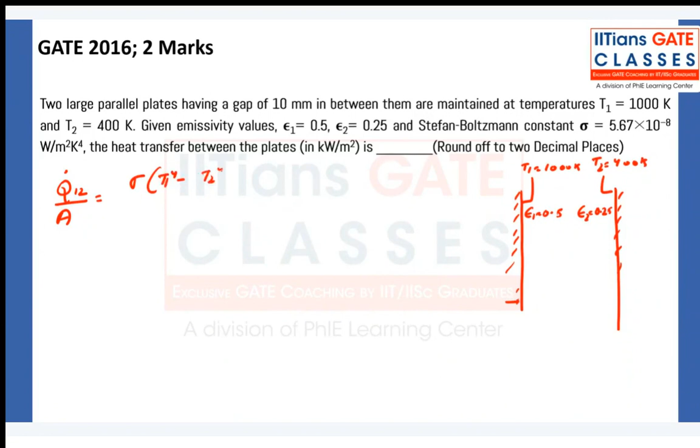Q by area equals sigma... yes that is correct, sign is correct. So T1 to the power 4 minus T2 to the power 4, upon 1 upon emissivity 1 plus 1 upon emissivity 2 minus 1. Very easy, right? Everything we already know, there is nothing new here. And it's a 2-mark question, shouldn't take more than 15 to 20 seconds to solve this in exam.

Shruti, did you get the answer? Is Shruti there or not? Okay, yes, 11.05 kilowatt per meter square. Very nice, let's move on to the last question.

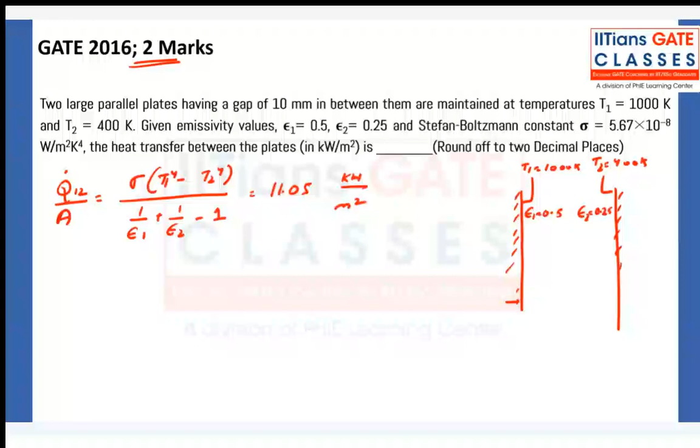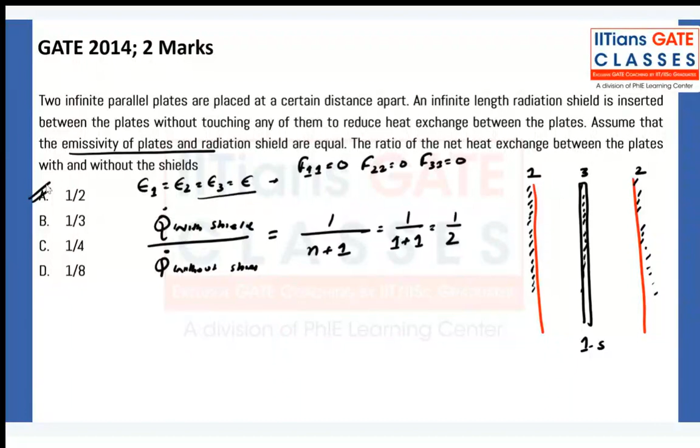Chalo, theek hai, so let's go to Vijaya. Do you want to solve that question? Okay chalo theek hai, let me try, let me see what you have sent me. Chalo. Okay, I need some space here for it. Chalo theek hai.